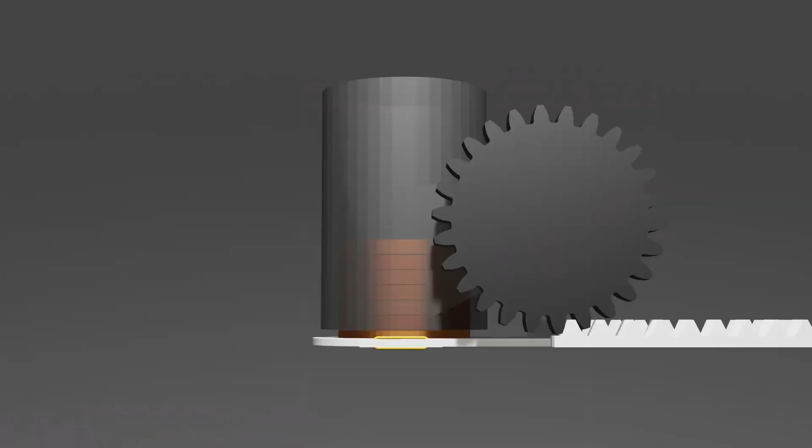So I had this crazy idea back in the day that I would be able to power at least a small portion of my robot using just a rubber band. If you watched the last few videos, you'll know that my goal really is to have positive control of the penny at all times. So I want the default to be holding on to the penny, and you actually need to trigger the machine in order to let go of the penny.

Now, because these components are so small, I got thinking about what size rubber bands I could use to actually power this. And I was thinking, like back in the day when I had braces, we used to have all sorts of rubber bands and little contraptions that would attach to the braces. And that made me think maybe those particular very tiny rubber bands were available.

But I did a quick search on Amazon, and of course, they have them for sale. So I'll leave a link in the description below if you actually want to purchase some for yourself. You can actually buy orthodontic style small rubber bands just on Amazon. So I thought that was really cool.

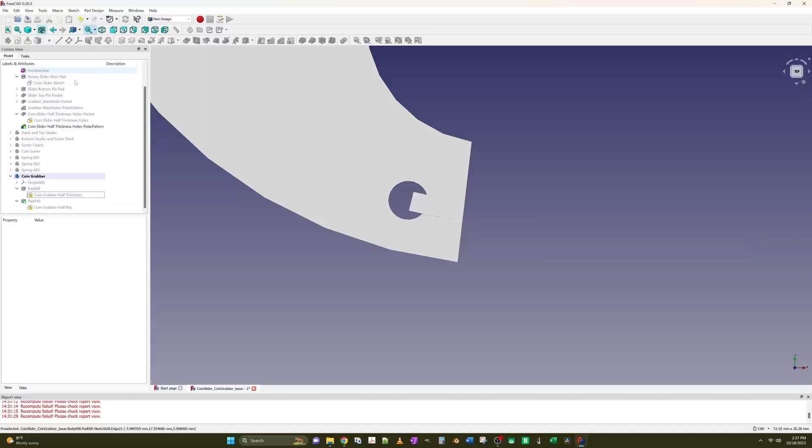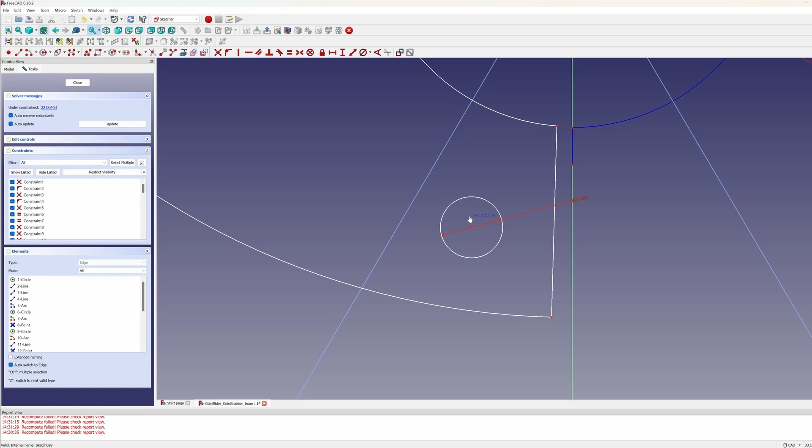Now, when you're trying to create things at this small scale, you actually run into issues of printer resolution. In this case, these rubber bands are so small that I wanted to create hooks in the coin grabber that would hold the rubber bands in slots so that they wouldn't interfere with the rotation of the coin slider. That became a particular challenge in FreeCAD as well, because as I was building out these layers, I had to think about exactly how the layers lined up. Also, FreeCAD does not allow you to draw a sketch that, when padded out, will result in multiple bodies. So that really became a challenge.

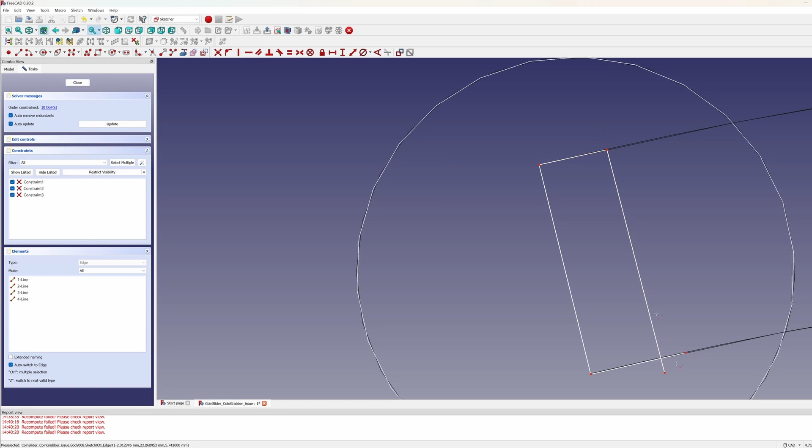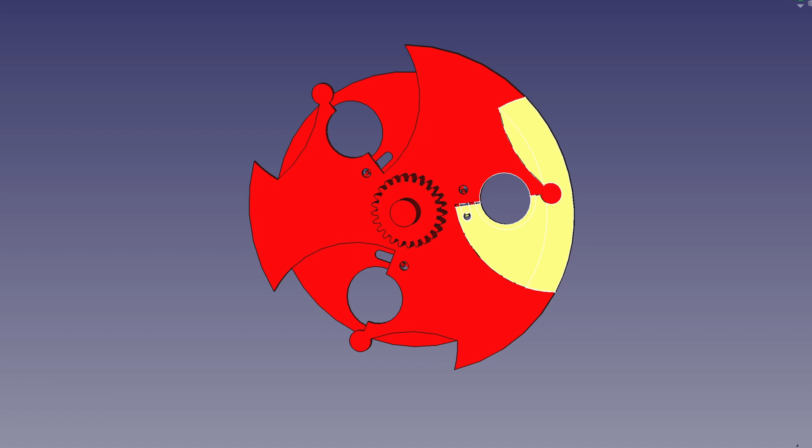Some holes went partly through the layers, and then once I got those cut out, I actually had to build a small hook on top of the lowest layer. But all in all, I got it eventually figured out, and I was pretty happy with the results. These little hooks worked out pretty well to hold on to the rubber band, and I ended up with a finished design that looked like something that was created by the Cardassians on Deep Space Nine.

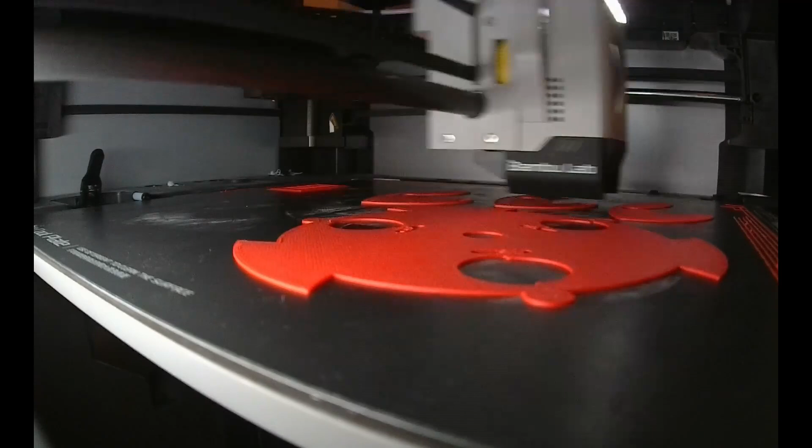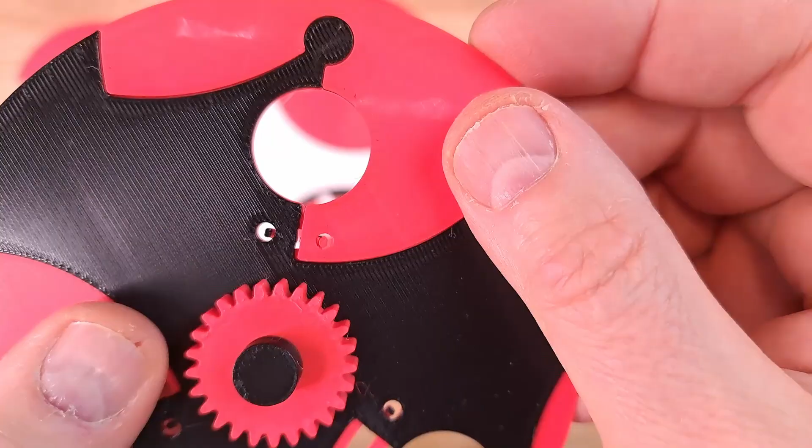So once I got everything printed out here, you can see that it worked pretty well. The hooks are almost the perfect size for these rubber bands that I purchased on Amazon. But the issue with them is that the rubber bands are actually a little too firm.

When you push down on the lever here, which is meant to trigger the release of the coin, you can see that the lever itself bends without actually opening the gap to release the penny. So that I felt was going to be an issue.

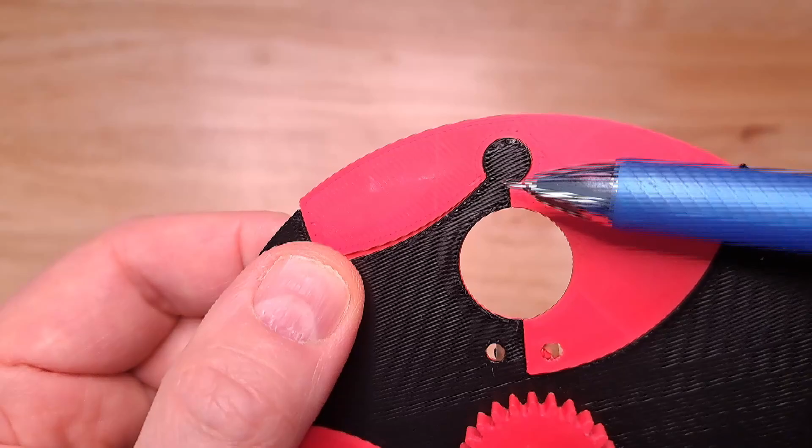When I got thinking about this, I was thinking that to correct that problem, I could actually just take this layer and make it a circle, and make sure the lever extends all the way around that pivot point so that we can apply pressure on both sides of the pivot point. And that allows you, even with the strength of the rubber bands holding it closed, to actually open up that gap and drop the penny.

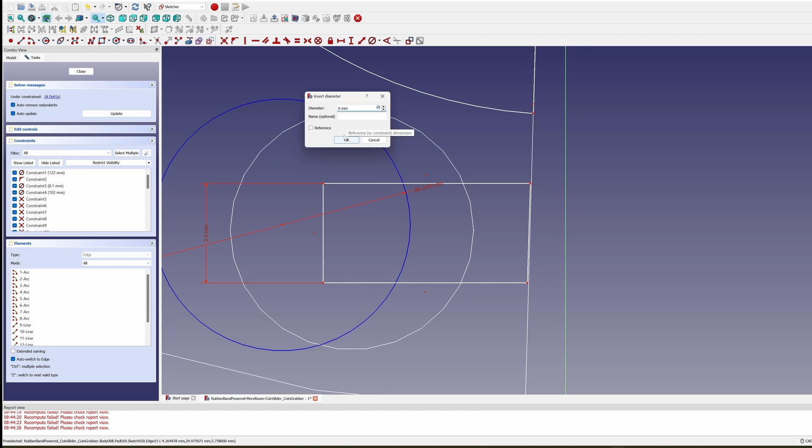So again, I had to go back to the drawing board and redo the design a little bit here. You can see me here working to get this situated a little bit better. And then once I do that, we of course have to print it out again.

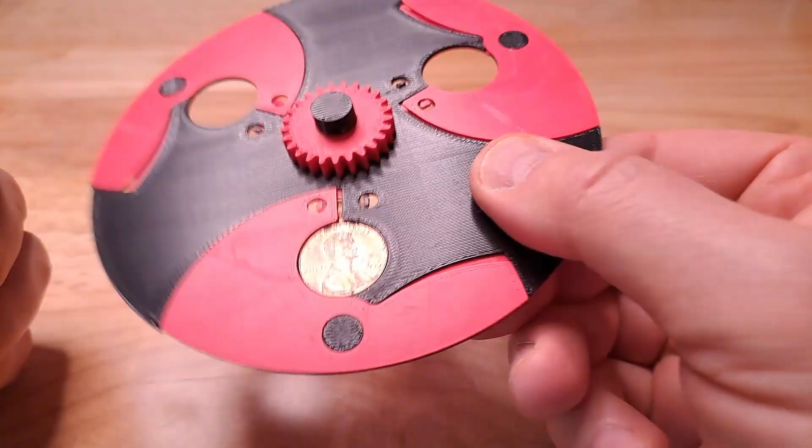You can see here that it works pretty well. It holds onto the coin positively, which is exactly what meets the design requirements. And when you press the lever, it releases the coin. So again, that meets another one of the design requirements.

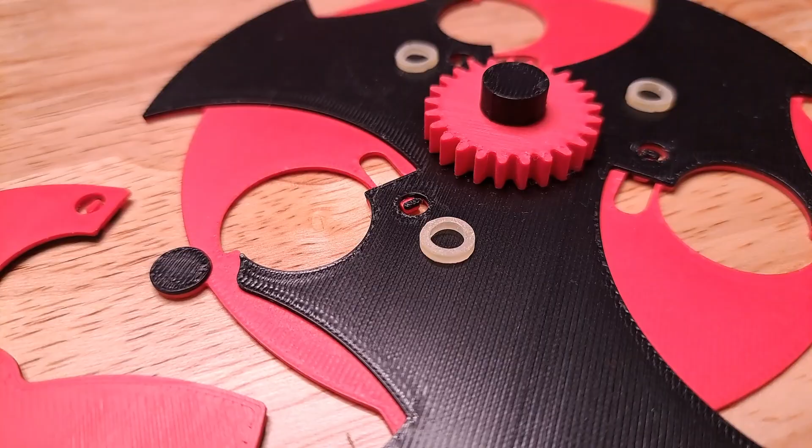But I'm still not happy with this, and I really don't want to call this a finished design. What I don't like about this right now is that there really are too many parts. One of my design requirements is to reduce the number of parts, and especially the number of moving parts. So I really want to try to get the part count down even further if I can.

In addition, because there's so many parts, and adding rubber bands just adds additional parts that are actually finicky to install, I really want to see if I can eliminate these rubber bands entirely. Now that I have a rough idea of how this mechanism is going to work, I think I have some ideas that we can use to create an even better design.

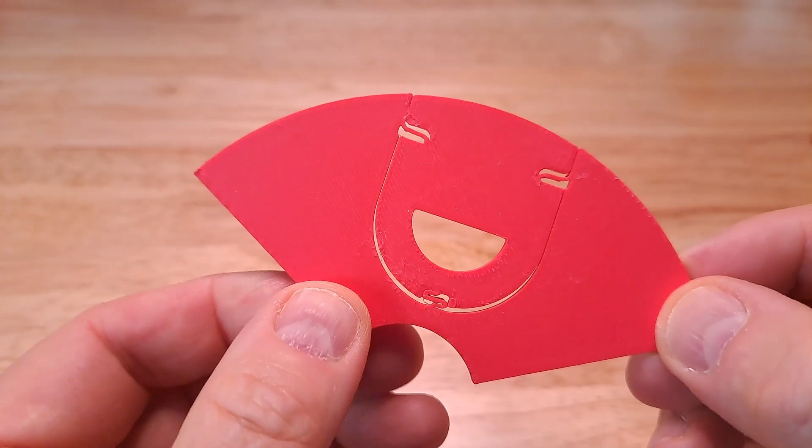The other thing that I don't like about this is that I would really like to be able to print as many parts as I can right in place, so that they work as soon as I pull them off the build plate, and we're not quite there yet. So we're going to be working towards a compliant design that I can print in place and uses the PLA plastic as sort of a spring that will help to actuate this coin grabber in and out.

My ultimate goal for this piece of the robot is to reduce the part count from 7 down to just 2. But we'll save that adventure for the next couple of videos. For now, that's my 2 cents. Thanks for watching, everyone. Stay awesome.